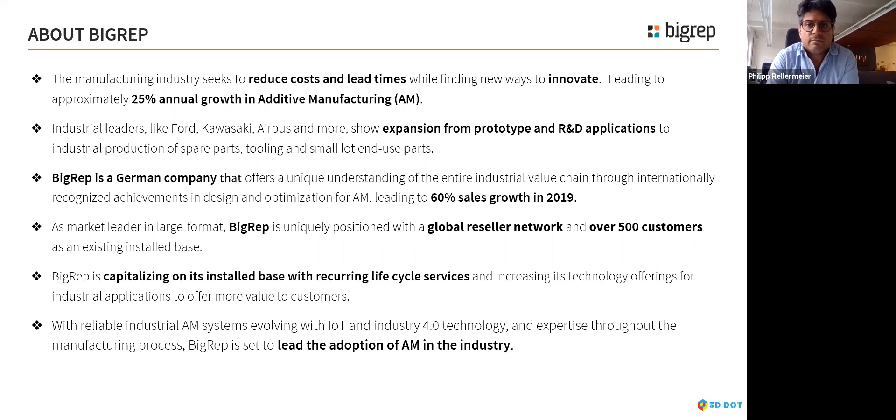To give you an overview of our solutions, we have this chart where you can see our machines and the level of service we offer. You see the 3 machines, the different levels of the platform, and then the processes. We also have the materials and the applications.

The 2 printers you see here on the left side, the BigRep 1 and the Studio, are one of the platforms in the applications of prototyping forms and molds. The Studio also goes into patterns, molds, jigs and fixtures with a direct drive extrusion. That's more on the standard polymer side.

If you go more industrial, engineered grade polymers, we have also the Studio, but also our BigRep Pro, which has a metering extruder technology, a very fast printing technology. Here you can also go into end-use parts, spare parts, and production tooling.

Okay. Can you just go back, because that was too quick?

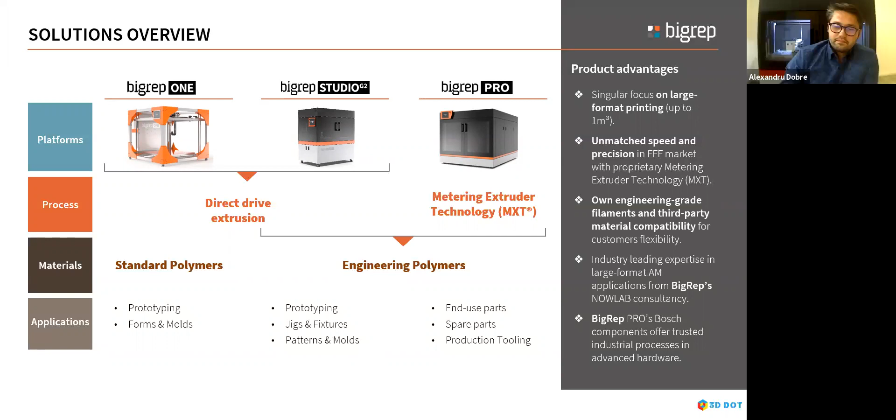Okay, should we move on? Yes, please.

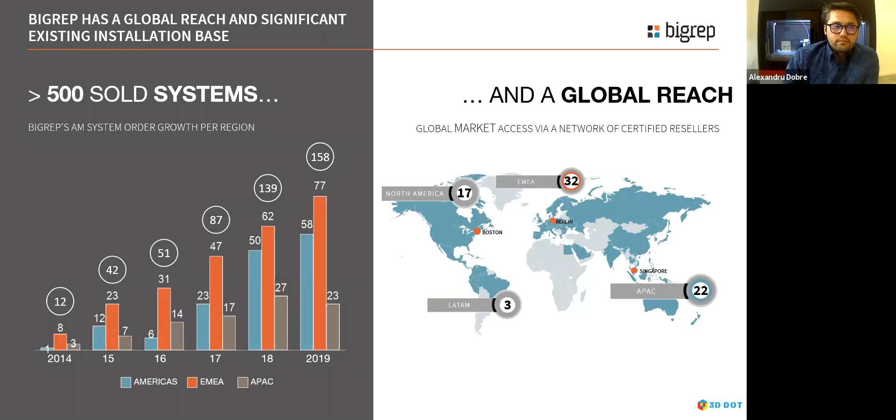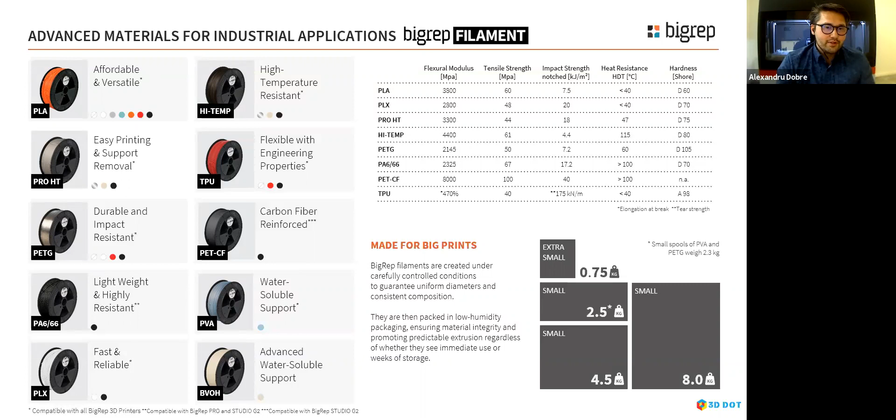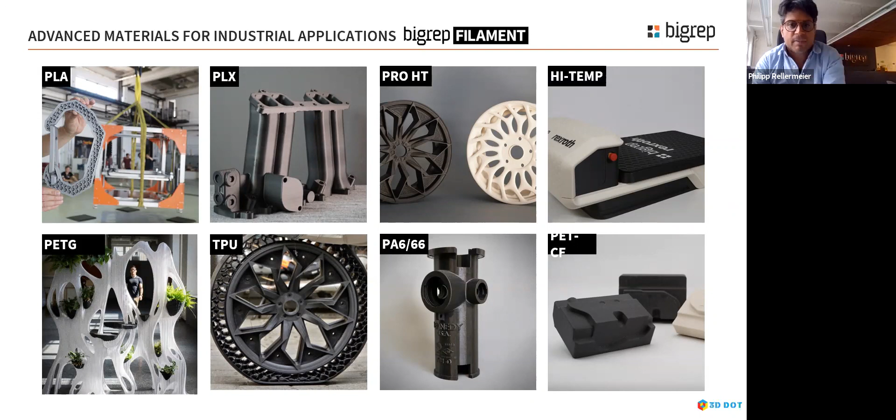I would like to have a better focus on our Studio G2, since Alexandru has this unit in the back. You see it running here on a print for a customer. This studio machine is one of our machines. Can I move to the next slide? Yes, please, have a look on that one.

Main applications for the Studio G2 are jigs and fixtures. What do they need? They need engineered grade filaments, they should be durable and cost effective, and of course in large dimensions, large form and flexibility. Then the other applications are design and functional prototyping, easy to use, proven platform.

This is Studio G2, so second generation of our studio. It's a proven concept - we learned from our past and improved all the elements. You can also print low-cost materials on that, like PLA, or even ASA, which isn't that expensive and is actually a high material, UV resistant and weather resistant.

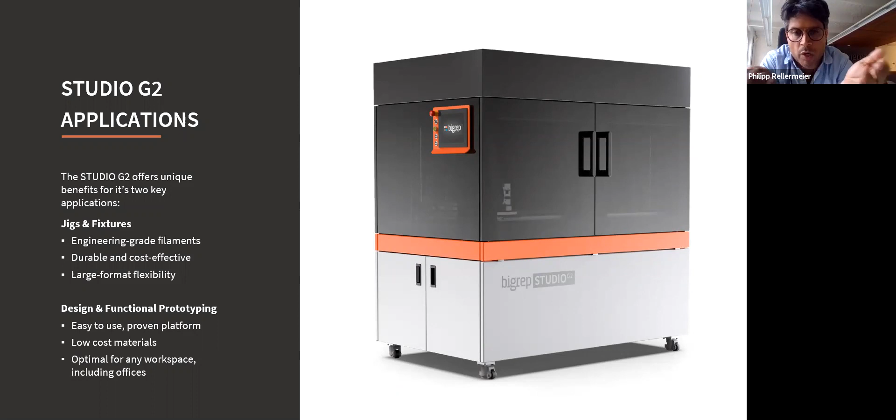It's also optimal for any workspace, including offices, that's why you see it in the back of Alexandru. The reason we invented that was because the other one is a quite big printer with a 1 cubic meter print space, and we wanted a smaller one to fit into offices. That's the solution we have - it fits in offices and can work beside your desk if you want.

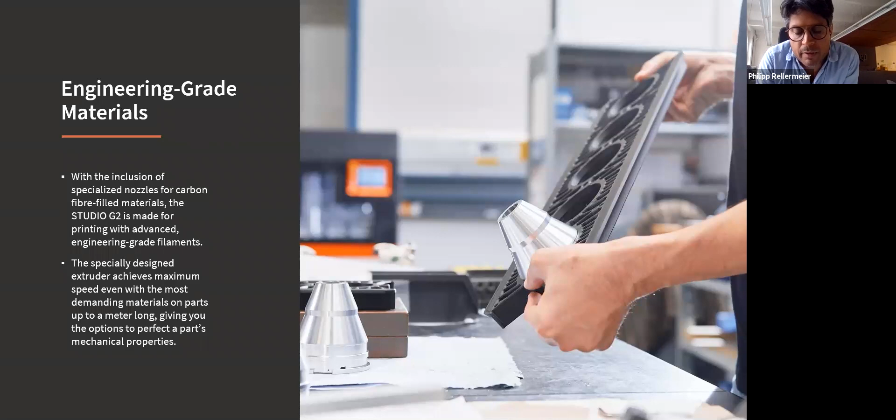Our customers are expecting high engineering grade materials. That is possible with the G2 because the nozzles are made of tool steel, so it can also print filaments that are abrasive, like carbon reinforced materials. These extruders are specially designed to have maximum speed with the most demanding materials, while keeping the mechanical properties of the parts.

This printer is fully enclosed, other than the one which is completely open - this one is closed. This gives us the chance to have a constant temperature in the print space.

It offers the user easy access to the printed parts when you open the front door, for example, to have access to the complete print bed. Even here you can monitor the print because you have glass doors. A camera is also installed and can be watched through the internet, so you can see the complete print process wherever you are on the globe.

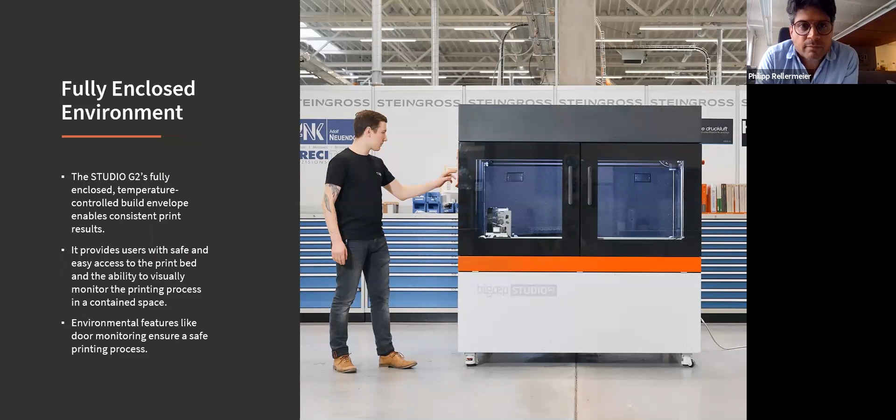You have a fast heating print bed, which is important. If you go up to 80 degrees, with a normal room temperature, it takes like 15 to 20 minutes. So you are ready to go.

You have a safety feature on the doors as well. If you open the door, it will stop the print because there are sensors that communicate with the printer, and then you can restart the print wherever you have stopped.

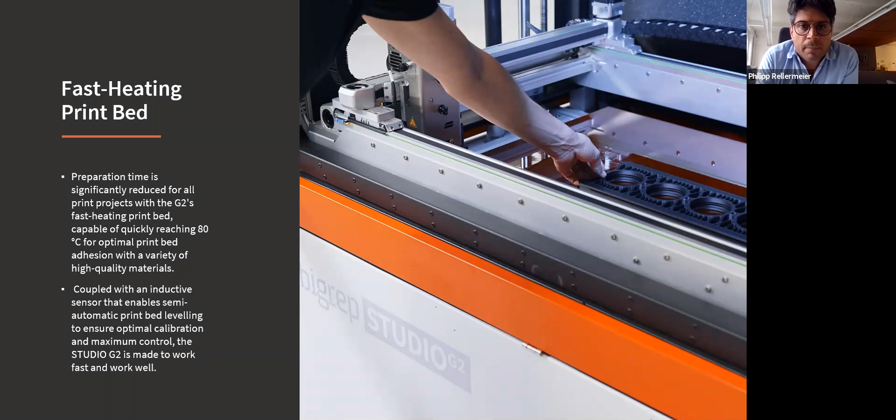You have a heated filament chamber, which is very important to keep filaments dry, because filaments like nylon, or even TPU, absorb water and liquid from the air, making it difficult to print. So whenever you open up a new spool, you can put it there, heat it up, and it's covered. You can set the temperature of both filament chambers, which have space for up to an 8 kilogram spool each. Same with the printing chamber - there you also have a heating control system which you can set.

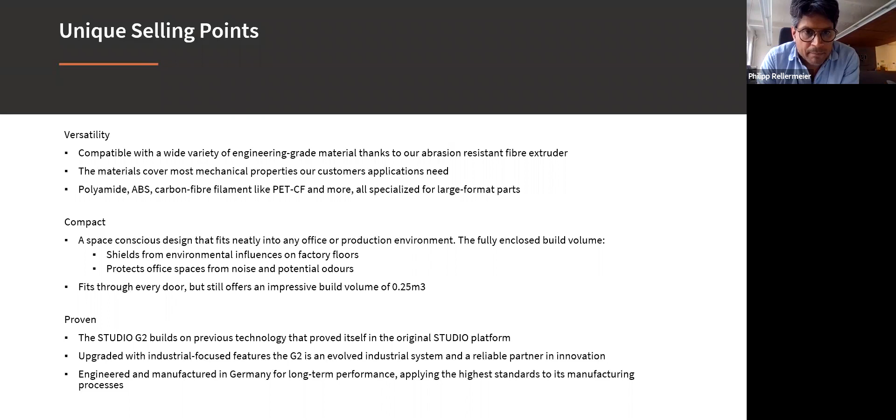Yeah. Thank you. Okay.

Just to give you an outlook on what we're working on and what we already have with the Pro. Speed is always a very important factor in 3D printing, everyone knows that.

We had discussions with our investors about what we would do if we had the money, and we said clearly: speed, improve the speed of our printers. So we invested in the MXT technology. It's a BigRep invention where filament is heated in a certain chamber and then extruded.

That gives full speed to the complete process, with an agile, German engineered component for tools or parts. That means you're very fast in the start and stop and moving around corners. It's a quite dynamic response with this technology.

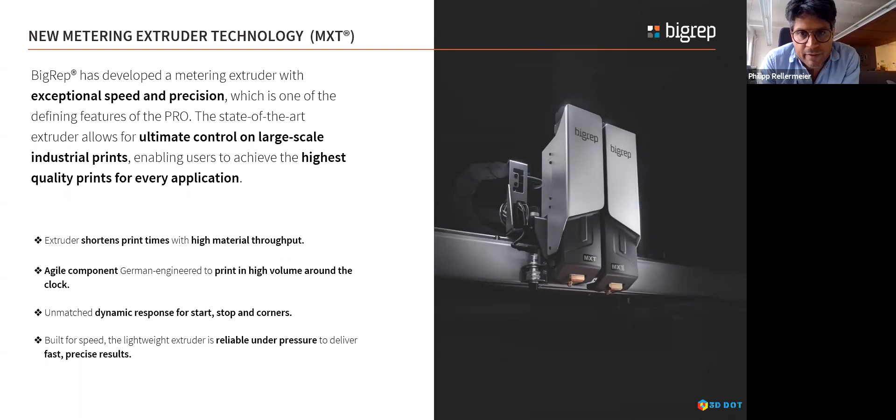Thank you very much, Philip, for this very nice presentation, an introduction to the wide range of 3D printer products BigRep is offering. I have to say that we at 3D Dot are very happy with our Studio G2 3D printer, and indeed it's a very good printer and it's quite versatile.

As you know from our experience, 3D printing is really adopted in companies that are keen on manufacturing, such as Ford, Airbus, and many others. When they're producing large parts, they have a lot of challenges, especially because they have very big facilities and need to produce large parts.

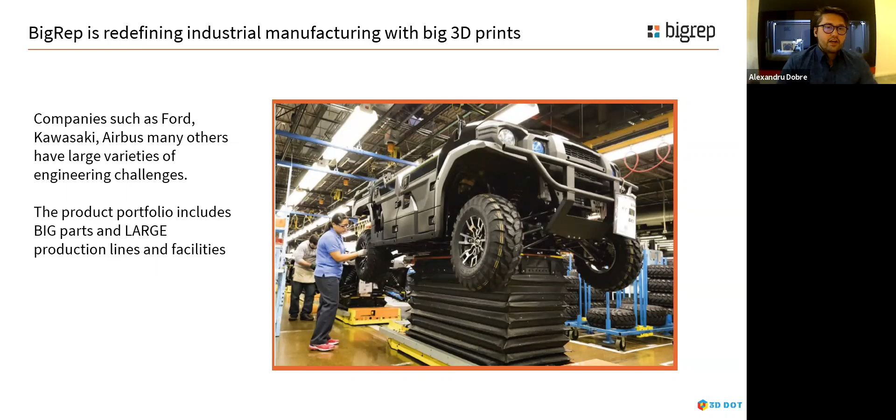Here we see a picture from a Kawasaki factory, giving a good image of how it looks inside and how complex such a facility is. For these sorts of facilities and production plants, they need a lot of jigs and fixtures, like Philip mentioned, and this sort of printer, the G2, is very good for that.

By the time a company is investing in additive manufacturing, the traditional way is they either outsource the parts to a third party, design it, outsource it, wait for that part to come into the production plant, validate it, and if something goes wrong, send it back. That means losing time and money, and it really slows down production, making it very ineffective.

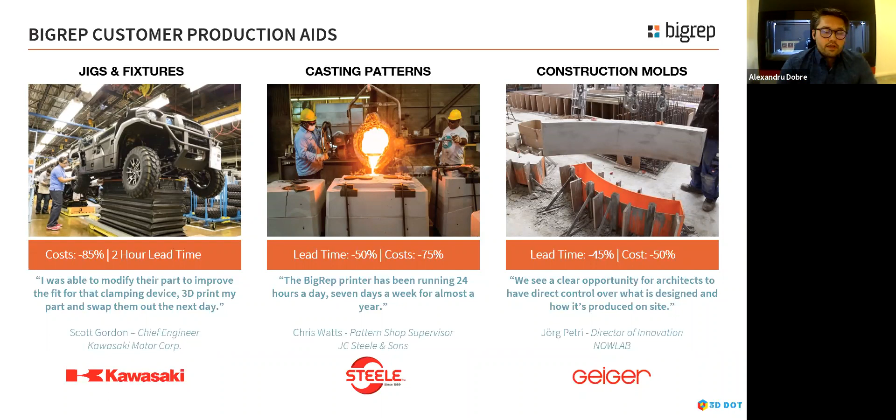For Ford, for instance, they did production aids. Ford has implemented additive manufacturing for around 30 years in their company, so they were a lead adopter, a lead user. But after introducing BigRep, they were able to do custom design for their production aids. They enabled many of their employees to use the printers, so they could rapidly prototype and develop these production aids. They gained a very good lead time, saving 94%, and they saved around 75% in costs.

Just to add something on Ford: they have one printer, and a second one is the Pro that they bought. They were doing this, what you see in the picture here, the window frame. They were using outsourced tooling that took them 10 to 12 weeks, for positioning sensors in the window frame. So the outsourcing waiting time, the lead time, was 10 to 12 weeks. Now they print them in 3 days and they're ready to go. This is such a significant gain for a company after introducing BigRep in their facilities, and everything is vertical right now, and it's much faster.

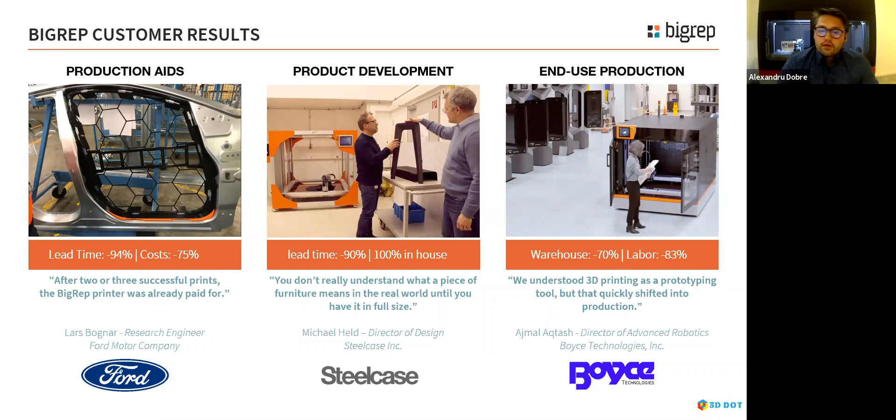Companies can also use these large-scale 3D printers for product development. With BigRep One, you can produce furniture or concept designs, and with Pro you can also make end-use parts because of their high quality prints. As I said earlier, you can also do a lot of concept design.

Even if you're a big company or a small company - for instance, Airbus produced these cases. Do you remember, was it batteries? Let me add something here to Airbus, which is also an important and interesting project where you can see what 3D printing can make possible. With Airbus, we had the challenge that they have to service special technical air components around the globe, sending them to the main service hubs in another region. These components cost like 20 to 30,000 euros each.

So what we did is take the CAD file of this component, and the software creates a box around it. This box, as you see here, is made of TPU - outside it's very hard TPU, and inside you have a very soft, flexible material. So it fits perfectly inside this box, is covered, and can be shipped without any damages.

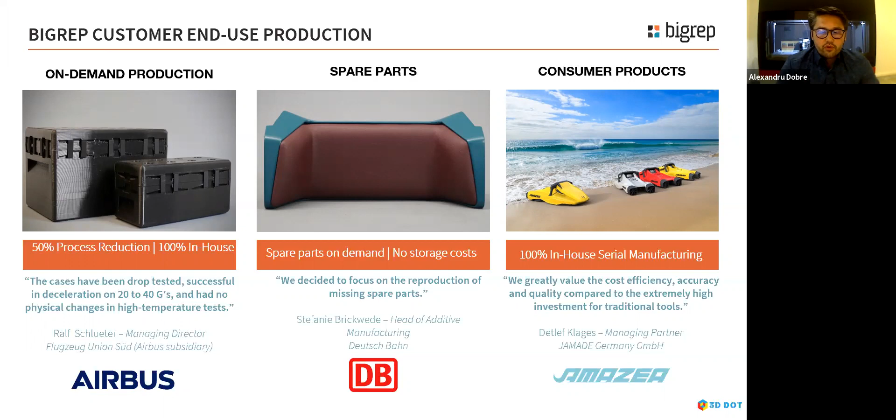I'd like to move on to exploring some creative horizons with big prints produced with BigRep, and I'm going to showcase an example later on that we used in our company. But before that, you can see that you can design prototypes - that bathtub was printed on a scale of 1 to 1 in 3 weeks. Then you have the bike from NOWLAB, from BigRep, which is 100% functional - a functional prototype you can validate, and it's 100% 3D printed. In the aerospace industry, you can always test new concepts, like aircraft cabin interiors, which you can develop and iterate very fast with 3D printing.

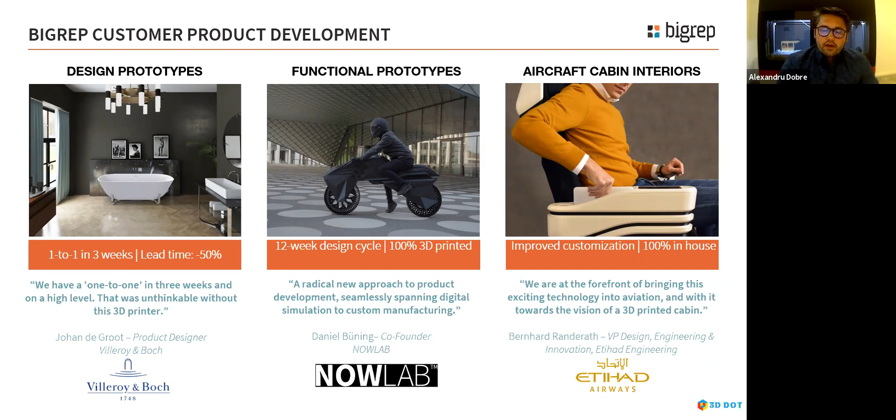In our company, we did print this very nice chair. I have it here with me. It's a terrace stool, I can show it to you. It is very nice, very light - it's 1 kilo. And we used the nice feature of the G2, the camera inside, to do a time lapse with it. I'll be happy to show it to you here to see how fast the printer worked - it took 1.5 days to print it, and I can say it's a functional prototype. I did sit on it, and I have 82 kilos, so it is a very good chair.

We printed it in Pro HT, and please let me show you in a minute the time lapse that we did. Just one second.

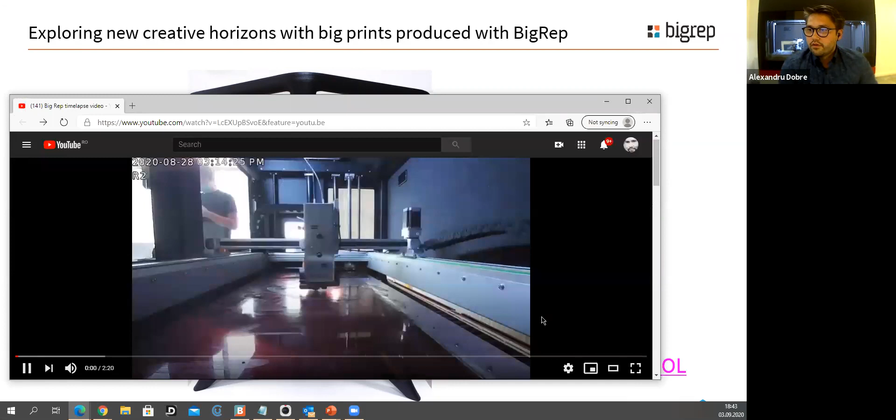Okay, just bear with me one second here. Oops, something went wrong here. Go full screen, full screen. I'll do that - oh my God. Yeah, it will work in a second. Just a little patience with technology. On the square, right? Yes. Right? Yes, yes, here. And I'll play it from the beginning.

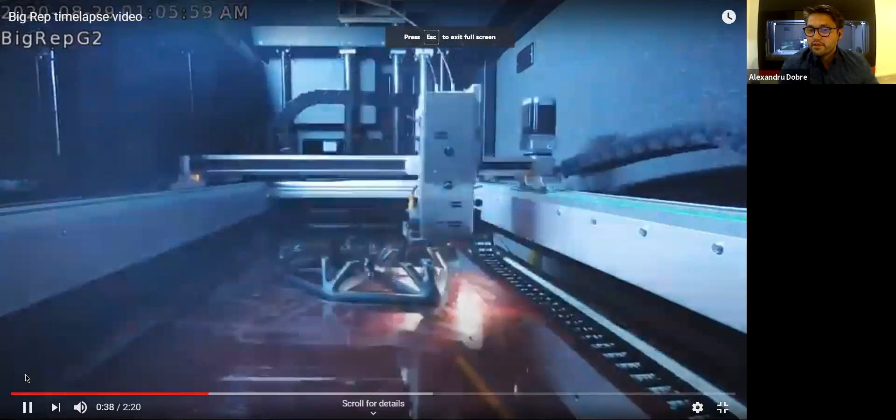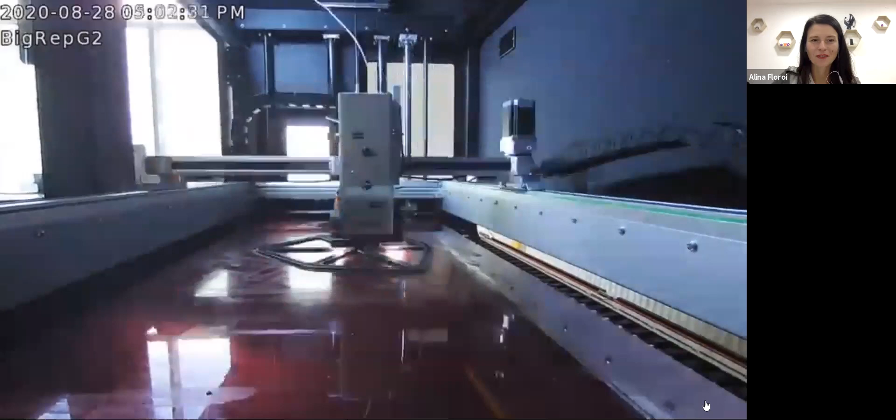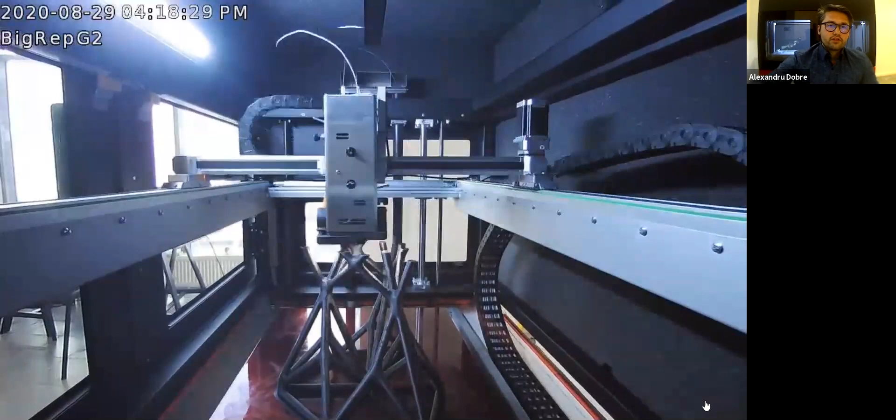You see, we started somewhere midday, and the chair is quite big, as you've seen. The Studio G2, as Philip mentioned, has the power extruder. Usually, if you had a small printer, you could still print this chair, but you'd need to slice it and glue it, and perhaps it would take a week to finish. But with the BigRep Studio G2, time flies by, and we were able to monitor the printer from outside our office with the camera that the Studio G2 has inside. We had no worries when we saw how fast and how good the print looked, so we had a very good sleep during that print. Usually, with an overnight print or prints that last 4 days, it's very hard to sleep because a lot of things can happen. For instance, the printer has a heated bed on the back, which helps provide stability for the print, and we also used glue to make sure the print would stick. It's also very good that the bed is not moving - for such a big printer it's obvious it shouldn't move, but if it did, you'd have the danger of moving the object from the build plate. So you see here the print went very fine, and we were able to have a successful print.

As I said, BigRep 3D printing is not only for big companies. It can also be very useful for any designer who has a very good idea and wants to produce it.

Okay, so I'd like to summarize how BigRep 3D printers can unlock profit instantly. When I'm saying profit, you can think about money and time, but it's more than that. Being a reliable printer comes with the fact that it is produced in Germany - you have German quality and German engineering, a machine which is reliable and very well thought out, and you have different generations of machines, which means this is a mature technology. You have fast returns, and by that I mean the speed with which the printer works. It's very easy to operate these printers because from what I've seen they work basically like a CNC machine, and because most of them are closed, like the Studio G2, you have no worries when printing with ABS or other materials sensitive to the printing environment. So it's very easy to operate these printers, and because you're able to monitor the printer from anywhere, you can act very fast if you see something that is not going right.

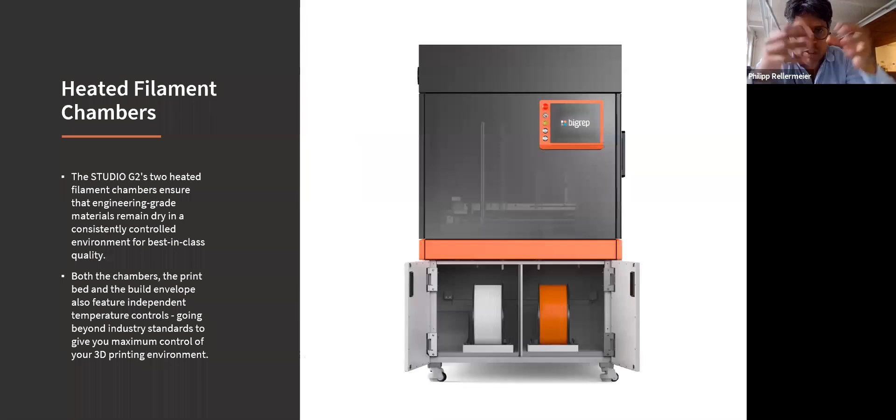This is a big difference in 3D printing because anyone who starts with 3D printing, even for us, a company with 4-year experience, still needs to learn a lot when printing with a printer like this. From my own experience, it is very easy to get in touch with the guys from BigRep to get information and good advice in order to have successful prints.

Just want to add something, Alexander, because you said it's very important for us to have a strong relationship with our customers. An example: we have a client, a big company called ThyssenKrupp. Everybody should know them. When they bought their first printer a long time ago, they were quite happy, but they came back with a list of items and said, guys, if you improve these, we will buy more. We did our homework, improved these points, and at the end they bought 4 more printers. So just to give an idea, we don't just sell a printer. We want to understand the process of the customer and support our clients along their way. It's very important that we get feedback from clients in order to improve our service and our machines.

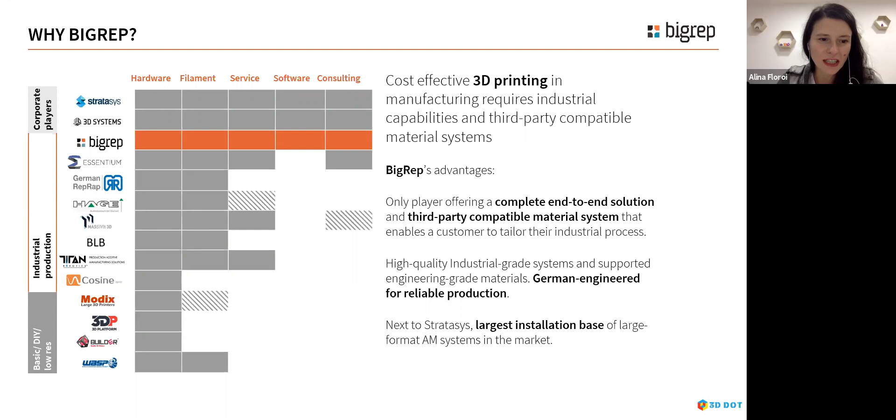The build volume of the Studio G2 is 1 meter, so 100 centimeters on the y-axis, 50 centimeters on the x-axis, and 50 centimeters on Z. So it's 100 by 50 by 50, a very generous build volume, I would say.

It's almost incredible. And another question: does the printer have the capability to print curved layers in order to avoid the stairs due to the thickness of the layer?

Oh, that's a technical question. Can you repeat it please? Curved layers, to avoid stairs. I don't know if it means printing curved layers on the Z-axis. There are some printers that can print curved layers on Z, which is quite difficult. But if you print layer by layer, you're still going to have the stairs while going up on Z. Let's see what Philipp has to say.

Yeah, I'm trying to understand that. You always have this kind of lines in the surface because that's the technology of additive manufacturing, fused filament fabrication. If you want a totally flat surface, you need post-processing, or a different technology. Very simple, you can sand it down. Of course, we can do curved layers, but you don't totally avoid the stairs.